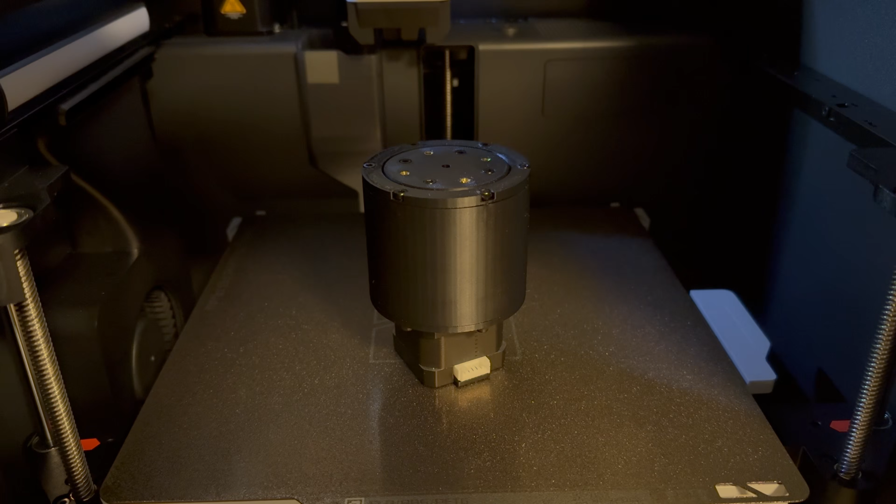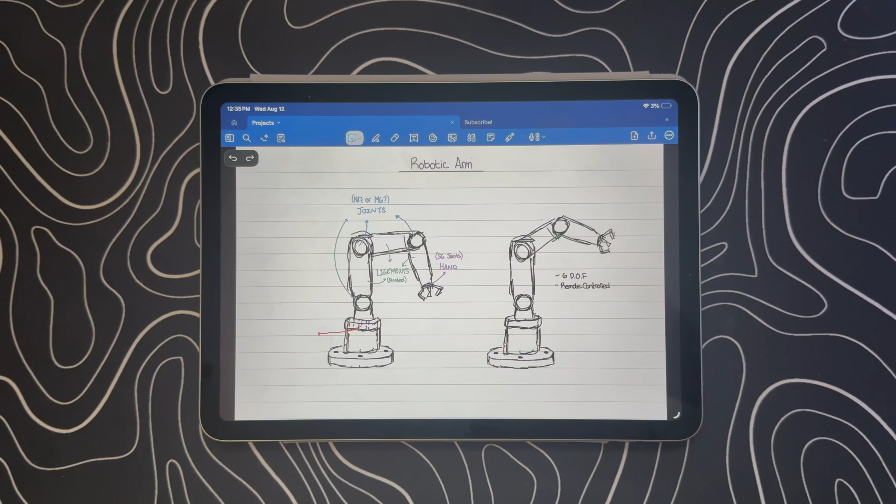So today, I got this big shipment of components in the mail, and what better way to get familiar with them all than to use them all in one build. I already had an idea in mind, because for some time now I've been wanting to make a robotic arm, and although it's not a necessity, I really wanted the base of the arm to be a harmonic drive.

And since my YouTube career can't yet provide the funds to buy one, that's exactly what we'll be building in today's video. Now, before we move on, let's talk about what a harmonic drive actually is. If you already know, feel free to skip this part. Okay, so technically it's called a strain wave gear, and it relies on elastic dynamics, which is a fancy way of saying we're purposely bending parts to make it work.

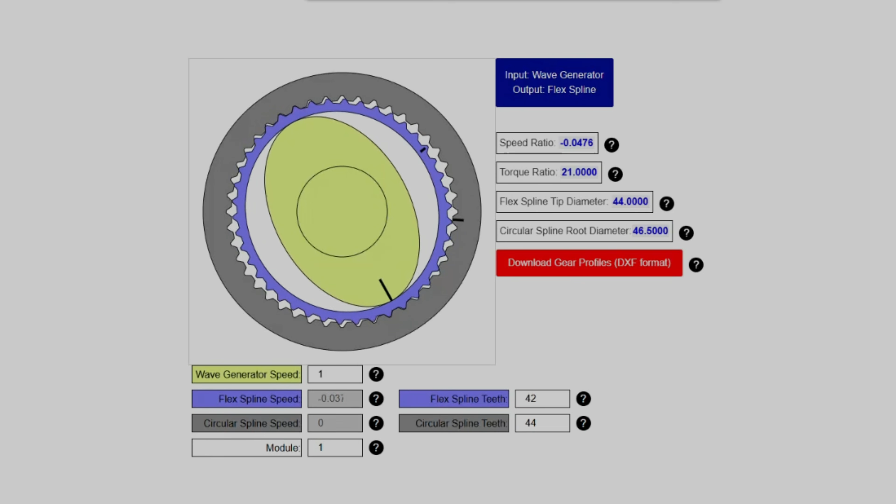Because the teeth are constantly meshed at 2 points, there's virtually zero backlash, meaning no sloppy movement or wiggling. That makes them absolute lifesavers in precision robotics. If you're dealing with a robotic arm, or even dealing with aerospace components, harmonic drives are what let you position heavy loads with pinpoint accuracy. In other words, they're a great way to have a big gear reduction in a small area. Alright, with all that out of the way, let's see what we're working with.

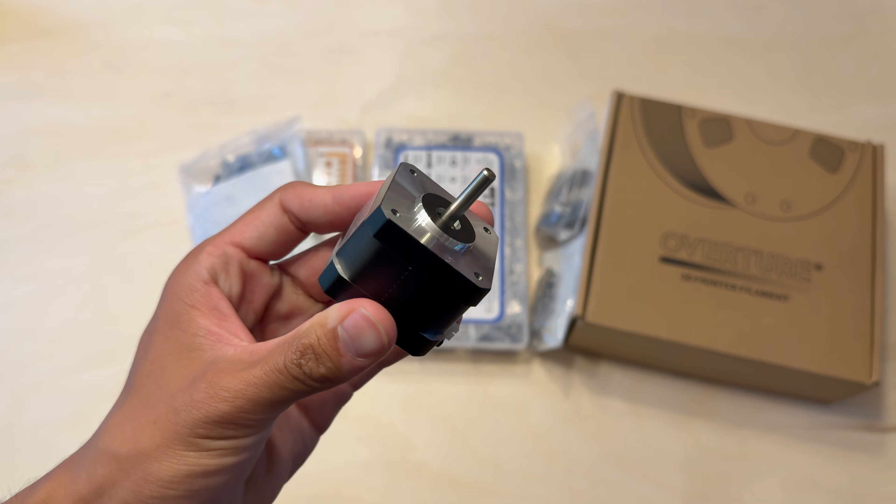First, the muscle of the entire project, the NEMA 17 stepper motor. These are the gold standard for 3D printers and DIY robotics because they offer excellent holding torque and precise position control. Of course, a motor is useless on its own, which is where these motor drivers come in. These act as the translator between our microcontroller and the motor itself, handling the high current and telling the NEMA 17 exactly when and how far to go.

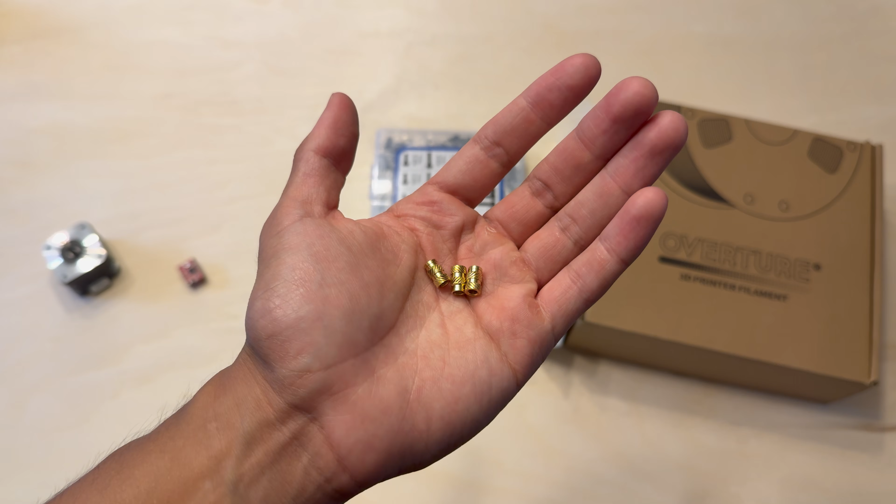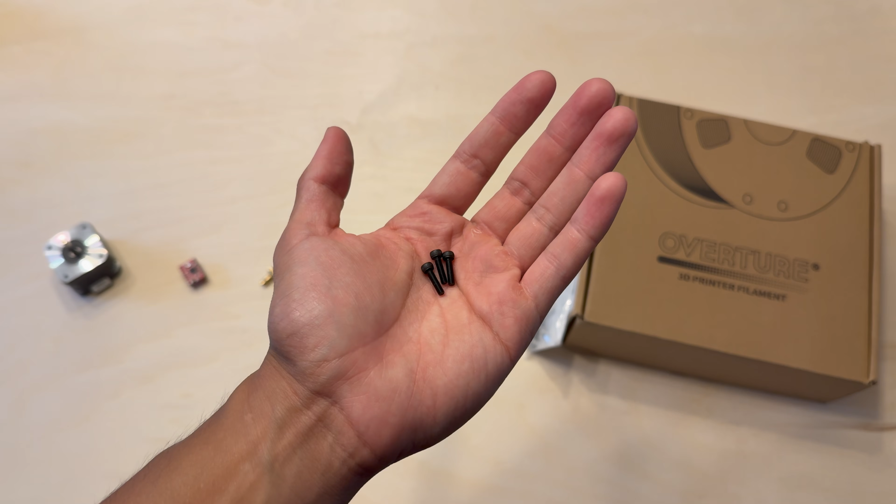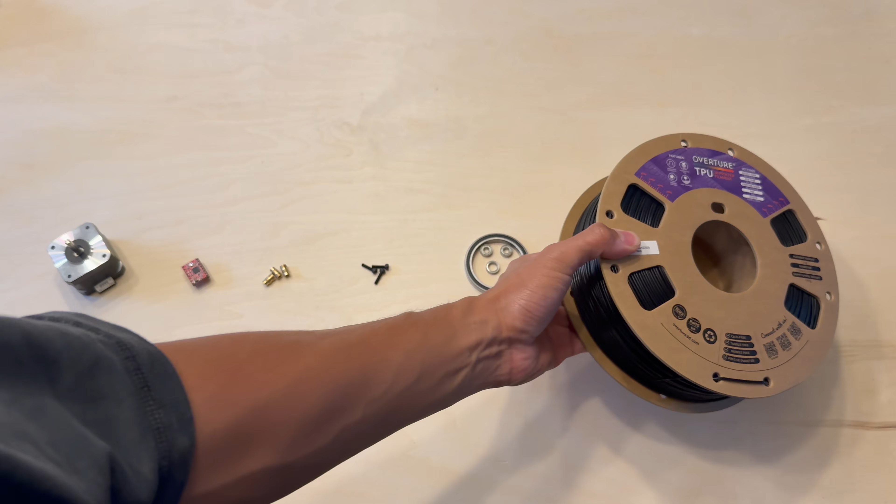Then there's this part that's easy to overlook but saves the whole build: heat set inserts. Threading steel screws straight into plastic is a recipe for stripped threads, so instead, a soldering iron melts these brass inserts permanently into our build, giving us strong, reusable metal threads. We also have screws to hold it all together, some different sized bearings, and last, but certainly not least, a roll of TPU, a flexible printing material and key to the elastic part of this design. Okay, with everything accounted for, let's jump right into the design process.

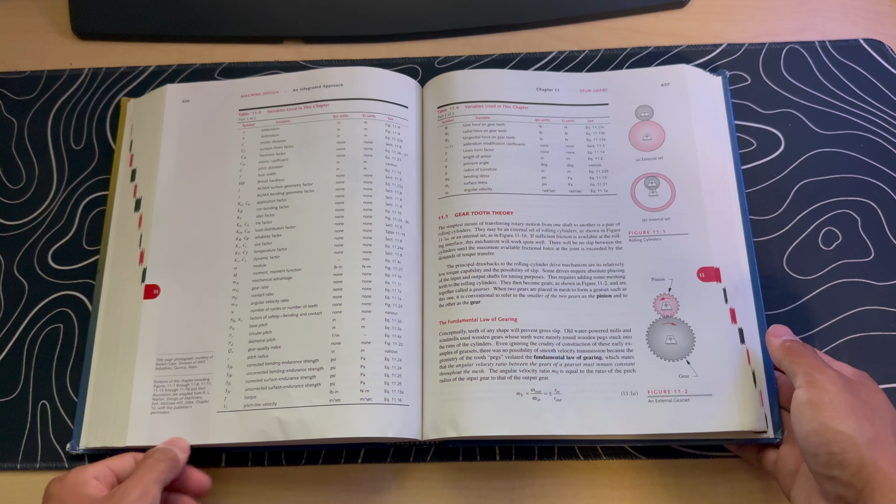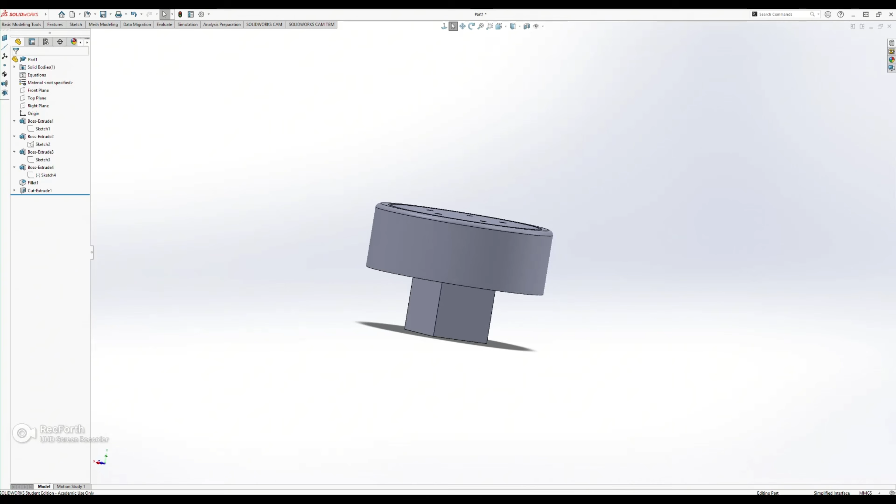Like always, I started with a ton of research. I looked at existing designs, gear theory, and way too many pages of this textbook until I had enough context to start sketching. My first design had a module, or a fancy way of saying tooth size, of 1, and a ratio of 30:1. All the math checked out in theory, but after modeling, I realized that it was way bulkier than I'd wanted. So I dropped the module to 0.8, updated my math accordingly, and started on my new model. Thankfully, SolidWorks has a great gear generation tool that saved me days of manual drafting, but I still spent the better part of a week creating and adjusting other components.

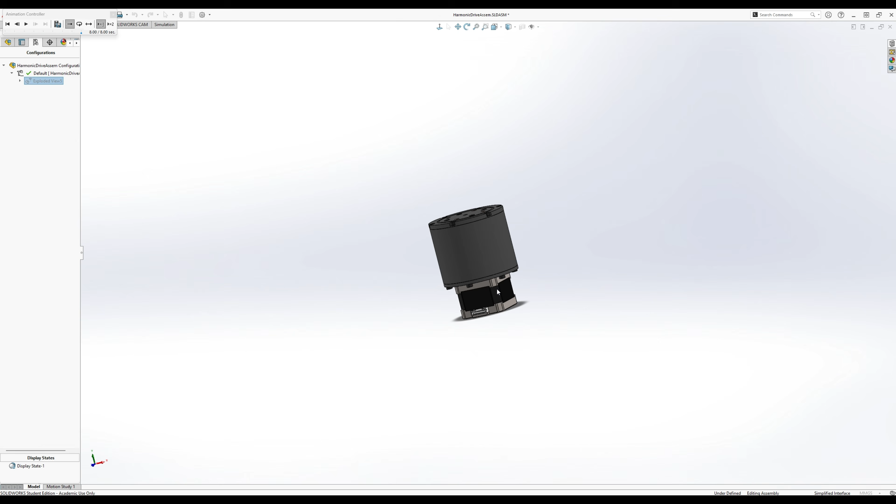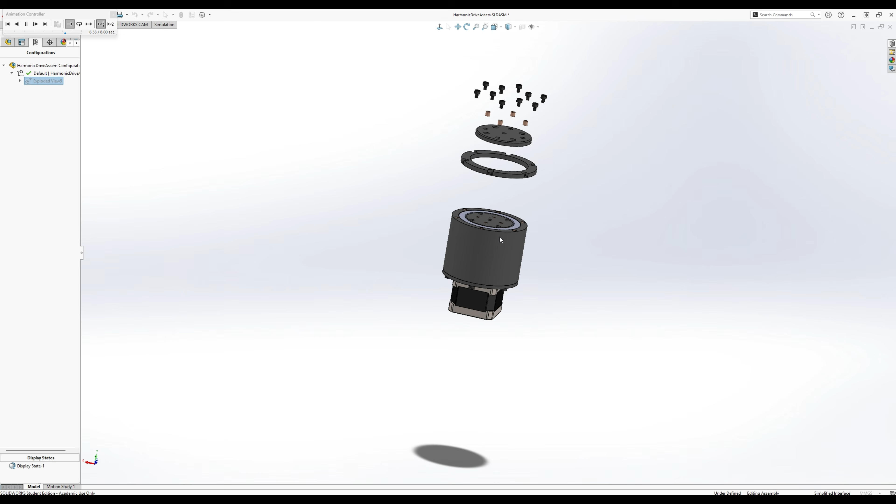As you can see here, this is what the final design looked like. It consists of 7 custom 3D printed parts along with the various purchased components I mentioned earlier in the video. My goal was to make it as compact as possible while still maintaining decent efficiency. I also had to consider the capabilities of my printer throughout the build, so I couldn't make any component, specifically the gear teeth, too small. With all that said, I was pretty proud of how my design came out, but I couldn't get excited yet because I still needed to print and assemble it.

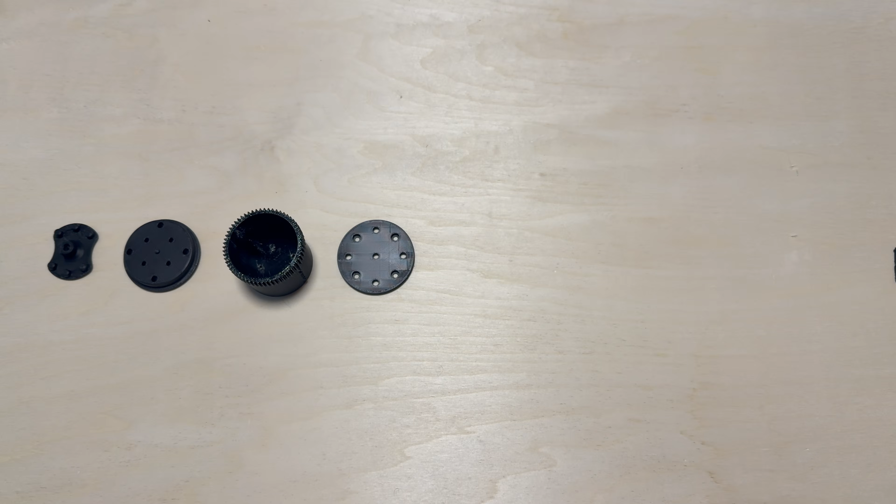Unlike in my last video, this time I was pretty careful while slicing and choosing printing specifics, especially while printing my first TPU component. Let's see how they turn out. I was pretty happy to see that mostly everything printed well on the first try. Unsurprisingly, the only issue was with the TPU component where I got some webbing. Thankfully though, it was an easy fix, and with all the components ready, it was time to assemble them.

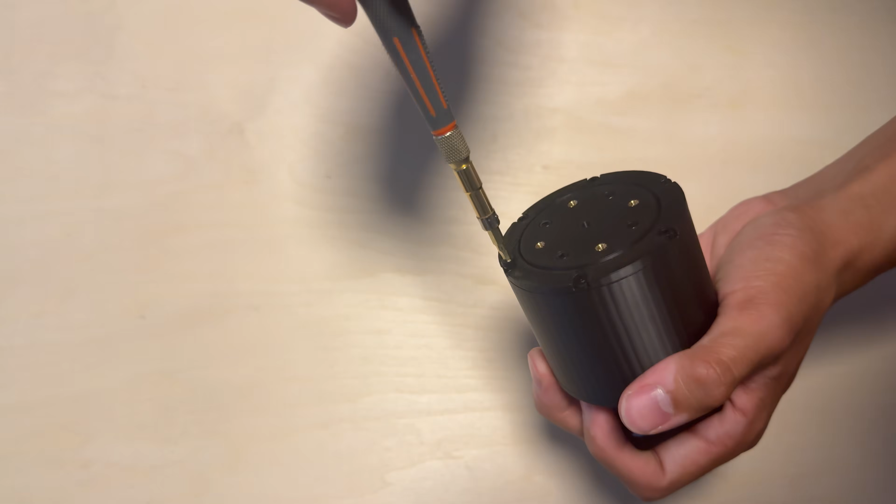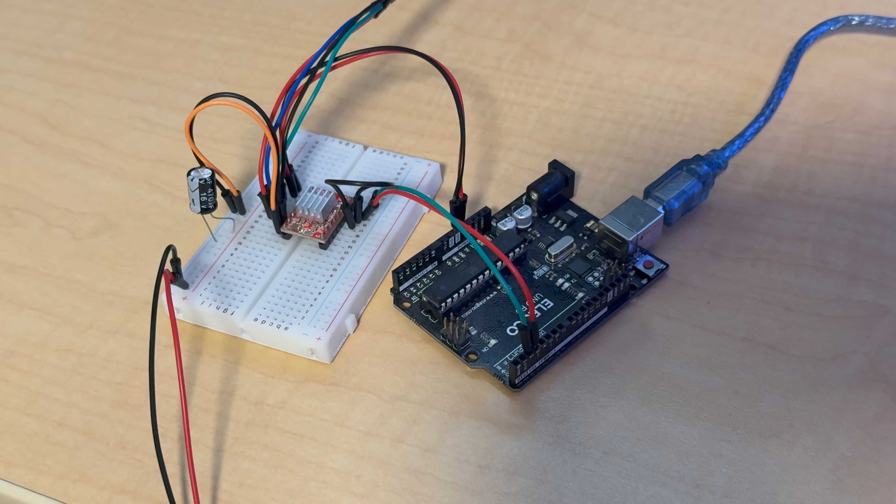Now, although it looks pretty awesome, we still need to see if it works. I wrote some basic code and assembled the simple circuit. If everything was done correctly, we should see it spin when I press this button. Okay, it's moving, which is a great sign, but we still need to know if it's working correctly. To do that, I put my harmonic drive through 2 tests. First, I input a code that made the motor run for 30 full revolutions. If I did everything correctly, this will amount to 1 full output rotation.

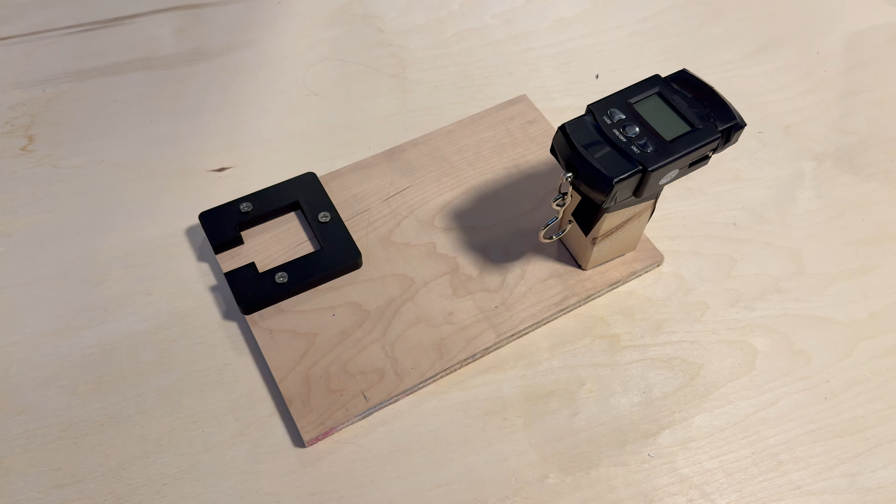For my second test, I wanted to see how repeatable it was. With no proper force gauge, I had to get creative. I attached an arm to the output of the drive, then mounted that and a suitcase scale to a platform. I connected them using an elastic at the arm's 10 cm point, ensuring it became taut when they were perpendicular. Then I had the drive move continuously through the same range of motion. I ran that test multiple times, and the scale consistently read about 45 grams when perpendicular and 280 grams when about 30 degrees past that point. While this setup isn't suitable for accurately determining the maximum torque of the drive, it does give us a way to demonstrate the repeatability of the prototype.

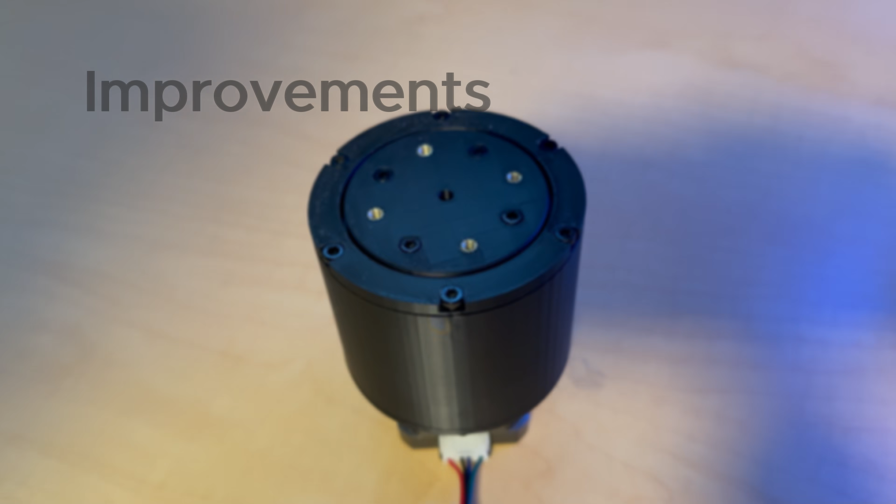Based on these results, I'm satisfied with how this project turned out, and I'll more than likely be using it for a future project. I was also pretty happy to see that everything worked well on the first try, considering I pre-wrote the entire script to this video assuming that would happen. However, if I were to make a second one, I would make a few small changes. I'd use fewer screws and heat set inserts to secure everything in place. This would make it easier to assemble while still keeping it secure.

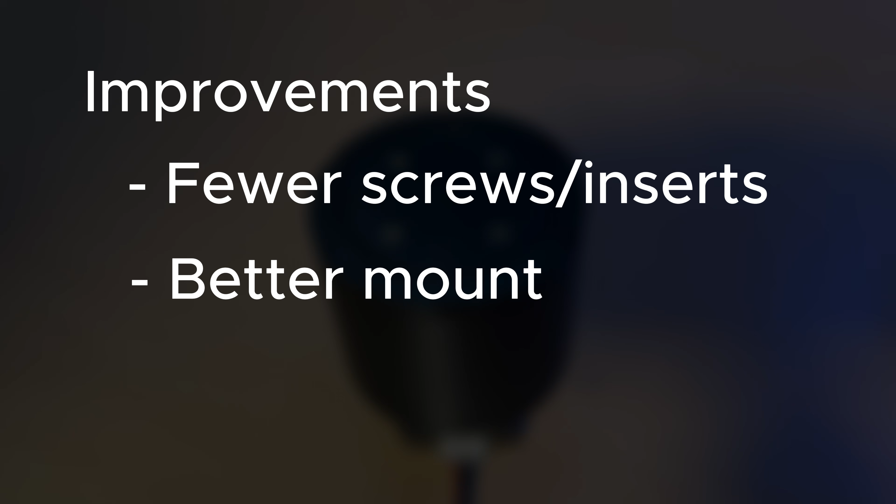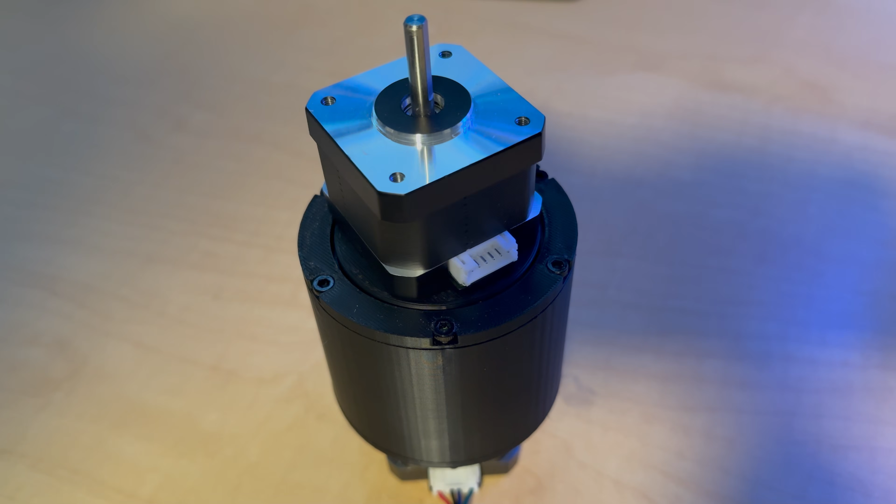A proper mount would also be helpful because, as you probably noticed during my tests, I still needed to hold it in place. And lastly, a more compact and mobile circuit would be an amazing addition, because right now I can only operate the harmonic drive a set distance away from my computer. Overall, I had a lot of fun making this, especially since it helped me get familiar with a bunch of components that I'd never used before. I hope that at least one person watching this has also learned something, or is even using this video to create their own harmonic drive.